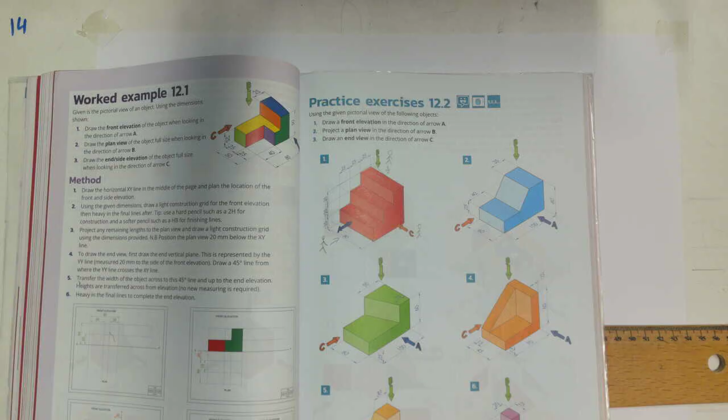As I said in class, the first thing I want you to do is draw a sketch of the actual 3D view given, and then we're going to use colours to show what we can see when we look from the different sides.

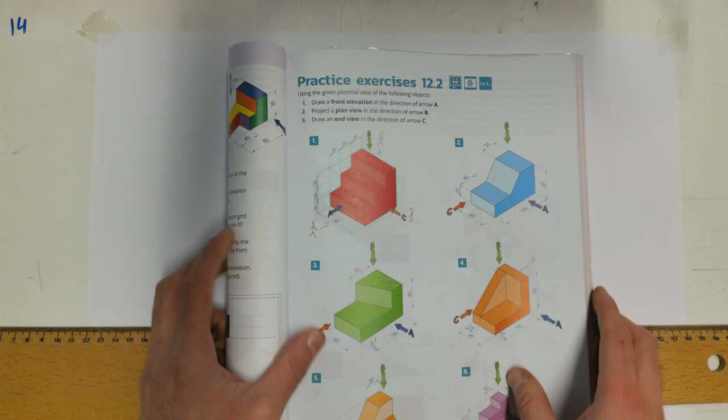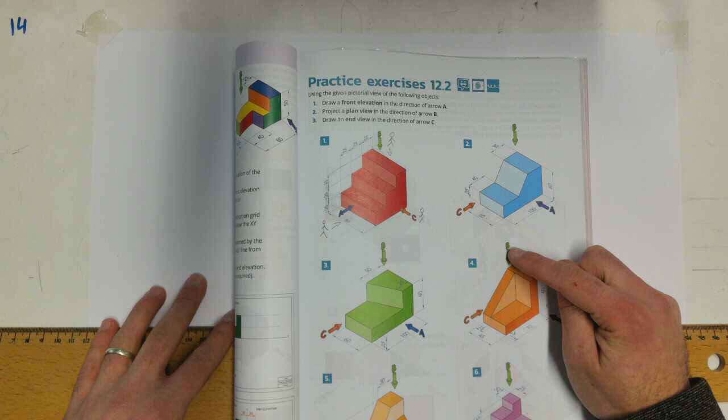The question tells us to draw a front elevation in the direction of arrow A. Arrow A points toward the left hand side, so we'll draw that on the left. Our plan view is the direction of arrow B, which goes directly underneath. Then an end view looking in the direction of arrow C, pointing off to the right, goes over here.

The first thing is we're going to draw a sketch of what the object actually looks like. We've done a little practice with 3D sketching already, and we'll use the crate or box method to sketch it out. So the first thing, as always,

draw a vertical line, going off roughly 30 degrees each side. After that, we're going to give our box a width, length, and height. With this object, it goes back a good bit on the right hand side, it's a lot narrower on the left, and the height is roughly about that, give or take.

You can see I'm now drawing my lines parallel back, and drawing my lines straight up, vertical here because it's going parallel to that. Then to finish off the top half of the box, I want to go parallel out that way, and then parallel to these two lines out to the left.

Now what I'm going to do is draw what's inside of it. First I'll take the front side here, that backwards L shape. It goes down like that, and then across all the way to the end. Then we can see there's a line going back this way.

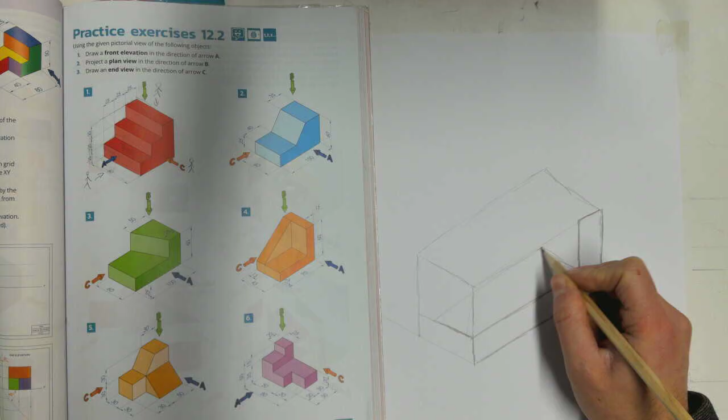What I can start to do then is go over heavy what I have so far. It's just a sketch, it doesn't have to be absolutely perfect. We just want to sketch out as best we can what we're actually going to be drawing, so we can colour it and see our different sides.

At the very top we have this rectangle, so that line is going back parallel there. Then we have our point here, which goes straight up to hit our line there.

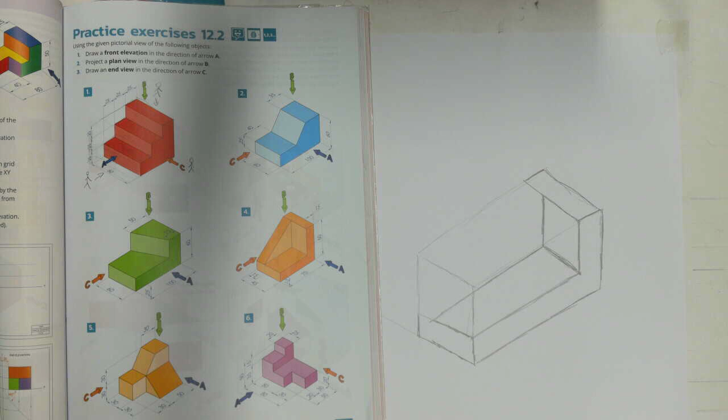The last thing we have is our slope going down this way. This point connects to here, as it is there, and this point back here connects to that point. You can see they're parallel as well — that distance is 15, so that would be 15 as well there, if you were to measure it out properly.

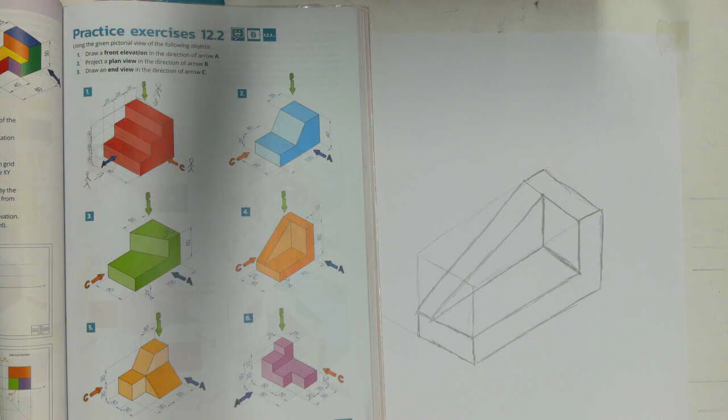That's our sketch in 3D. What I'm going to use then is a few colours to represent the different views. I'll use this purple colour for the direction of arrow A, which is our elevation. When we look this way,

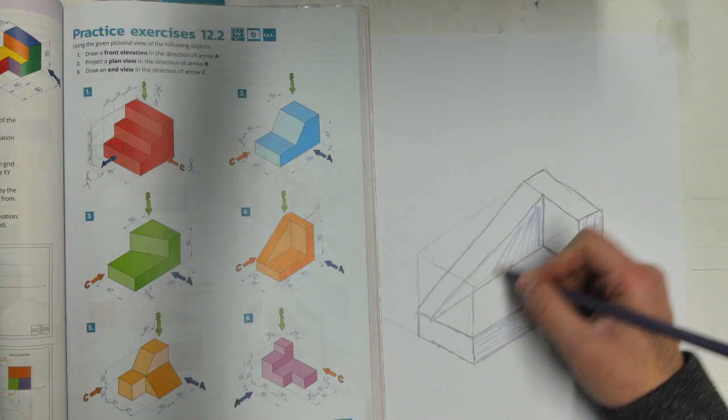what we can see is that backward shape L there, and this triangular surface as well. When we look down in our plan, I'll use this green colour for B, our plan. We can see that top surface, this rectangular surface, and then we can see this side here.

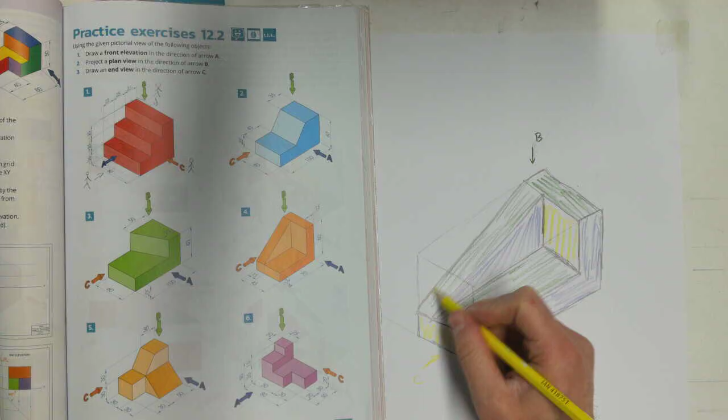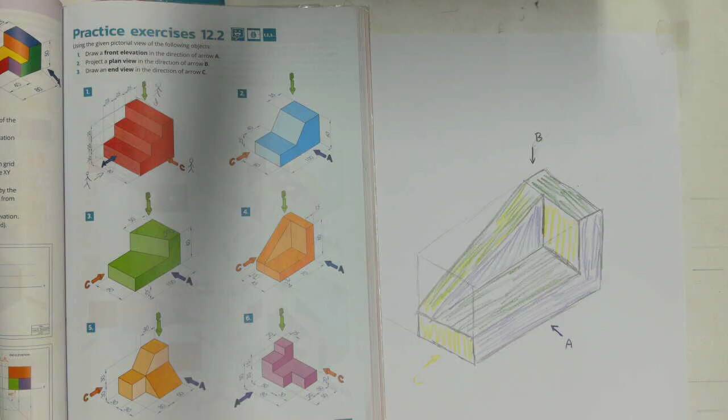Our last view is our end view, looking in this way, in yellow. What we can see is that rectangle, that shape, and then we can also see our slope surface. I'm going to mix the two together, because now you can see that side looking down from the top, you can also see it looking in that way — so we can see that side in two different views.

So using the measurements in the book, we're going to start drawing out the views then.

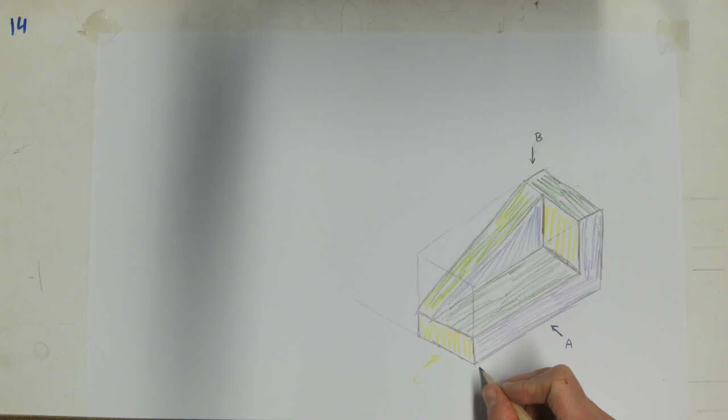Keeping to the top left, our elevation is going to go to the left because our arrow is pointing that way. I'm going to pick that as my starting point, SP. The height of the object is a total of 60, so I'm going to go down roughly about 80 mil from the top of my page.

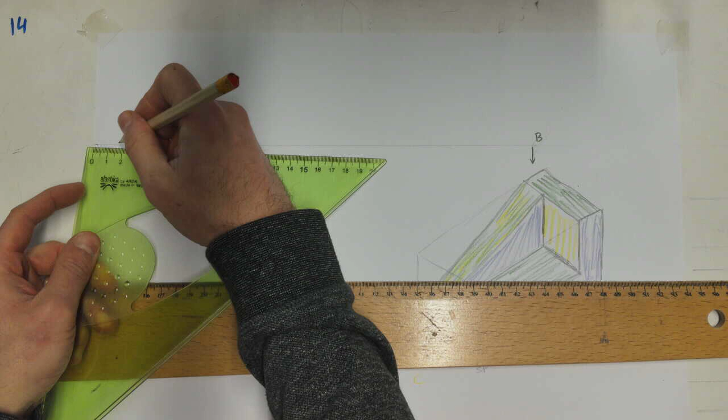So by about 20 mil space above it, I'm going to come in about 20 mil then to keep in from the left of the page as well. So that's my starting point there, SP.

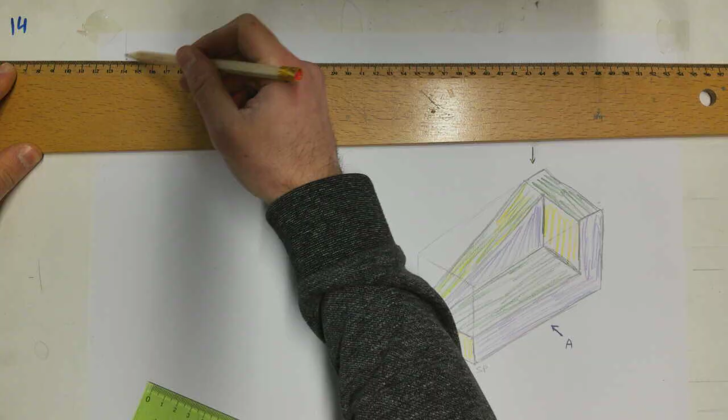As always, try to draw a box for the object to fit inside. The height of the object, we already know, is 60 mil in total, so I go up 60. Take my line across. And the width of the object when we look in at A is a total of 70 mil.

So that box is going to fit that view in. Now to get my backwards L, I want to get this width here first in the top right. And in the question it shows that's 15 mil.

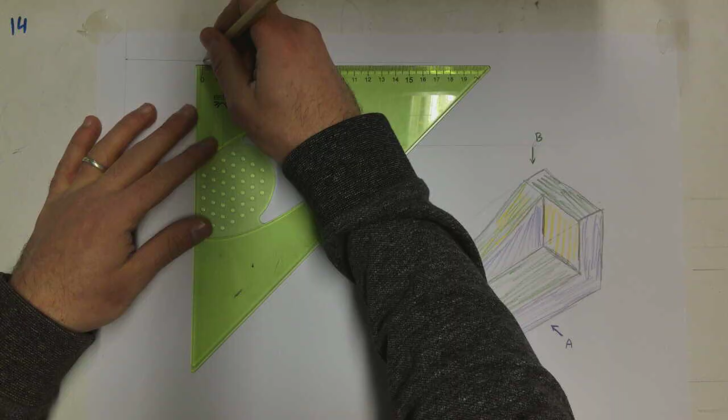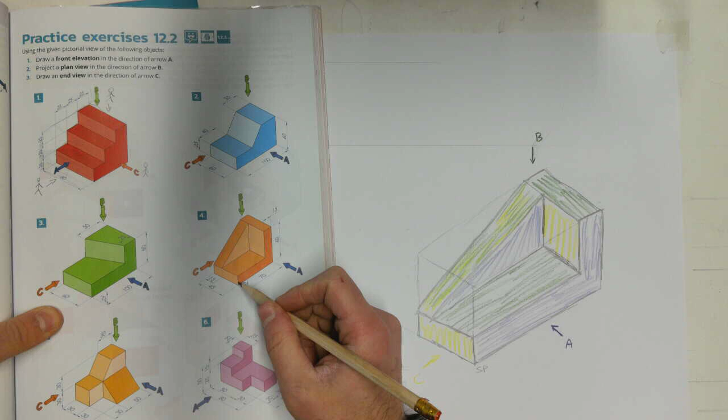That's going to be going straight down. Let's stop at this point here, which is a height of 15 mil up from the ground. So just to show you there - that's where I got my 15 mil height there, and that's where I got my 15 mil width from there.

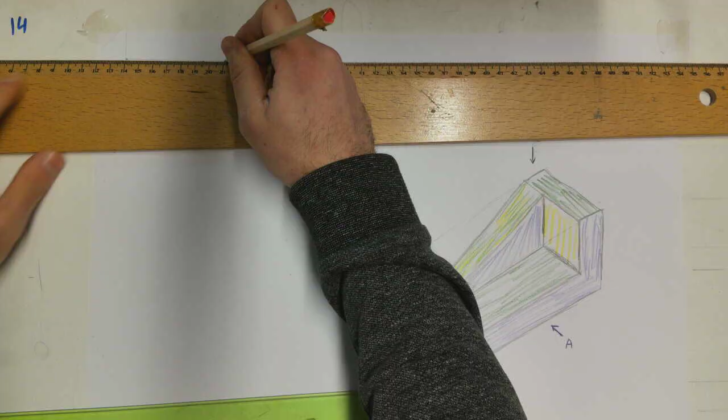And I take that across, and now I have that backwards L shape drawn in there, so that purple bit there.

Next thing we have is that triangle that's left, and we can see one end of it is at the very end point, which is here. The other end of it is at the very top point here. So all I have to do is connect those two together, and that completes my elevation.

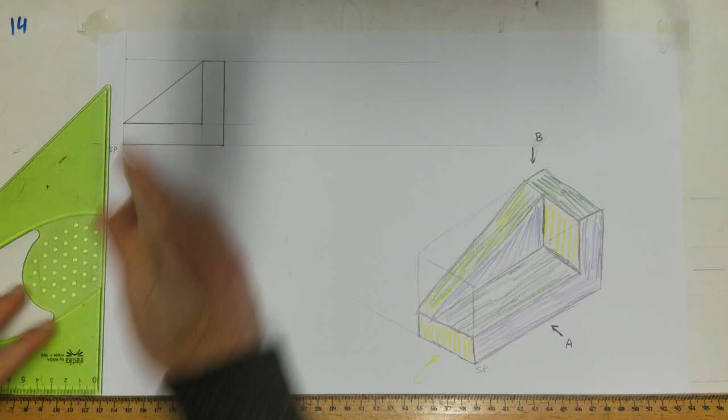So what I can see is that backwards L, that triangle - there's my backwards L, there's my triangle. For the plan, it always goes directly underneath, and what you always do is take all of your widths down into it. I'm going to do about a 20 mil gap in between my two views.

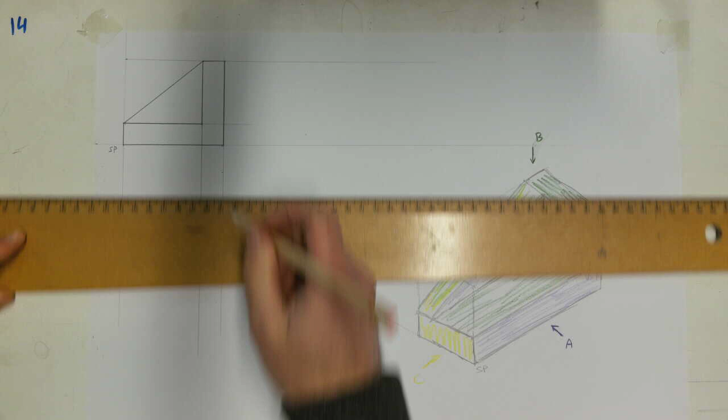For this view here, looking down from top, I'm looking at my length and my depth this time - the distance going across and the distance going back. I already have all my widths going across here. Now I need my depths going back.

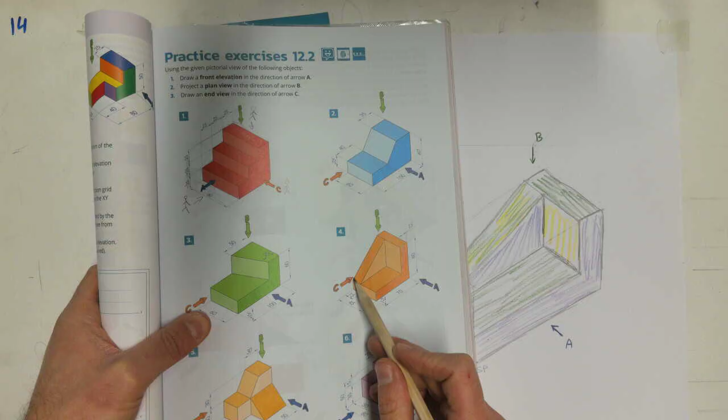In the question, you can see you're given two measurements: 15 for that bit there, and 45 for the entirety of it, all the way across. So I'm going to go down 15, because that's my distance going back there, and it's a total of 45. And we take those across.

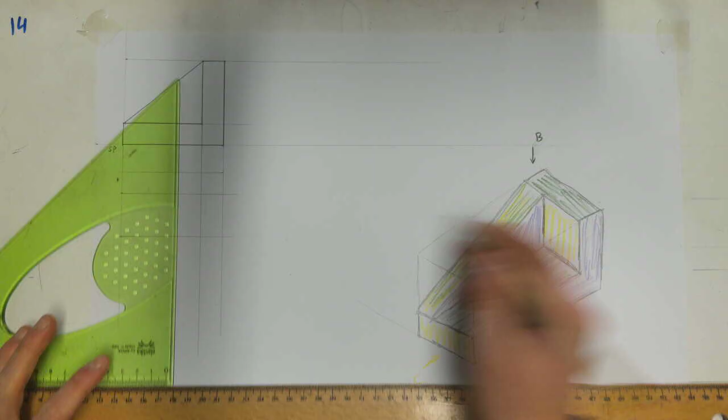So looking down on top, what I can see is that green rectangle at the back, that goes from one corner to the other, like that there. It's that width there, which is this width, so I follow it down, giving me that rectangle there, and this long rectangle here, which is this front bit here.

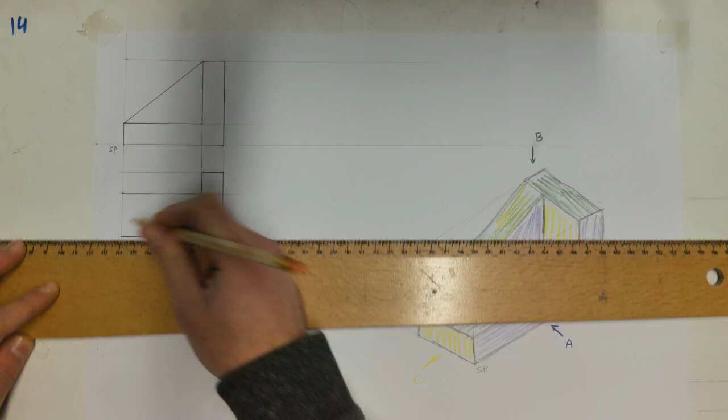And the last one is going to be that rectangle that goes along there, which is the bit I've left at the back there. That's the bit that I want to see in two views - that's where my green and yellow are mixed together for that part there.

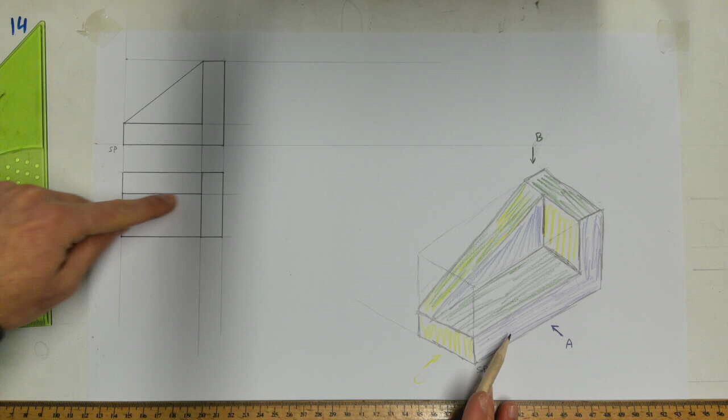So when we look in at our end view this way, which is looking in this direction here, we're going to see that sloping surface as well. Last part then for the end view - we have all of our heights, so we can just take them across. We don't need to remeasure them.

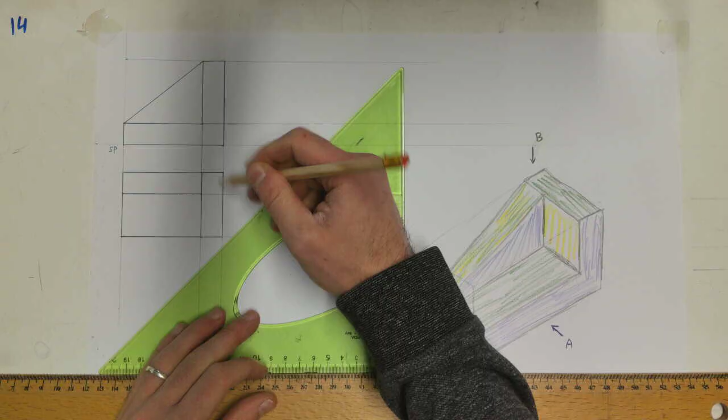And then we take our depth there, our thickness, and we go 45 degrees from our nearest edge here to the end of the view. So we take that across, we take that across.

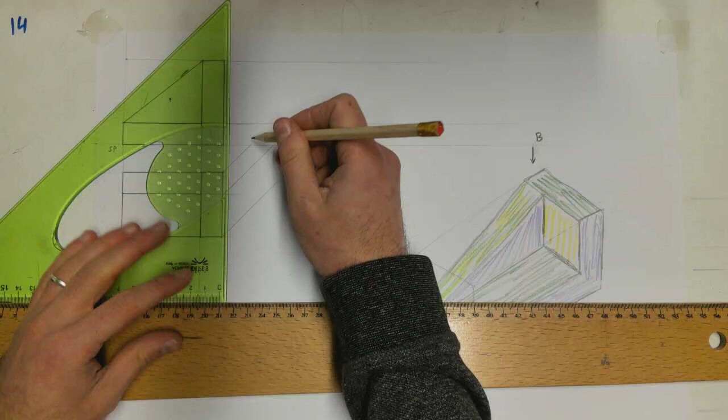Now included in it is going to be this line here. So what you always do is take it all the way across to the end of the plan, and take that up at 45 degrees as well. Where it hits your baseline, you take them straight up, and now this box is going to fit in our view looking in. First of all, we can see that rectangle.

It's the complete width there, from there to there, and it's up 15, which I already have taken from my height there across.

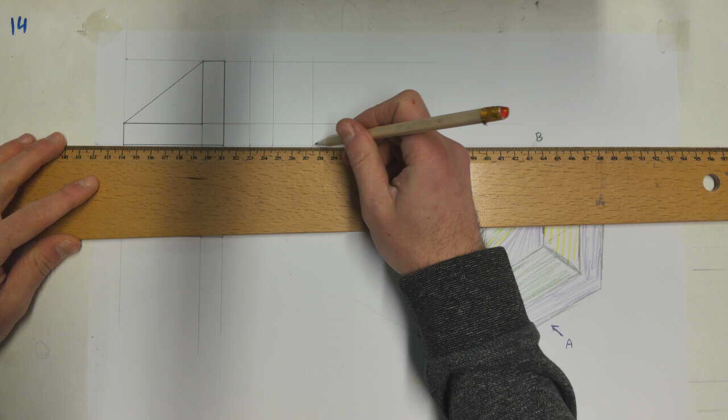On the left hand side, I have that slope and surface there, and it runs all the way to the top. It's 15 mil wide, which is that width there that I followed up. So we can take that line there, that line there.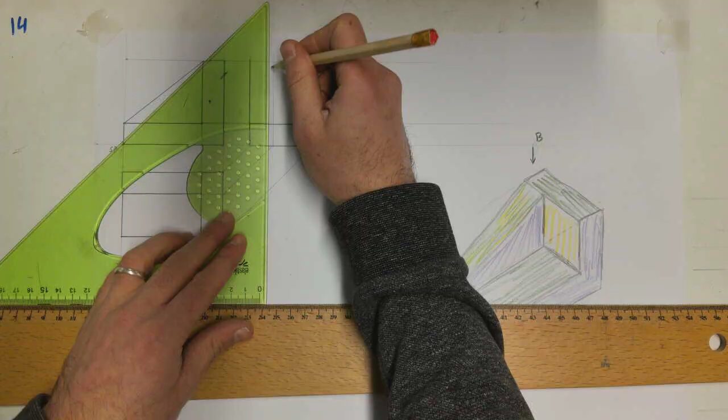The last little bit then, I can see that box there in yellow, which is going to be this box here. And that completes the three views.

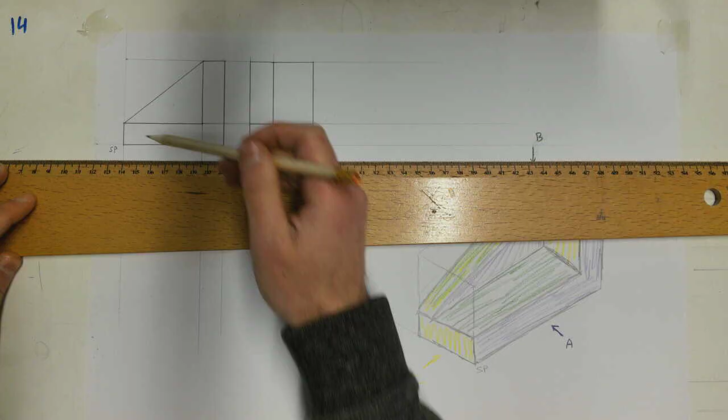Last thing I'm going to do is just draw two sets of lines, and I'm going to write in the name of my views. So there's my elevation - that was looking at arrow A. There's my end view - that was looking at arrow C. And there's my plan - that was looking down on arrow B.

So hopefully that video helps anybody who may have been stuck on that question for homework.